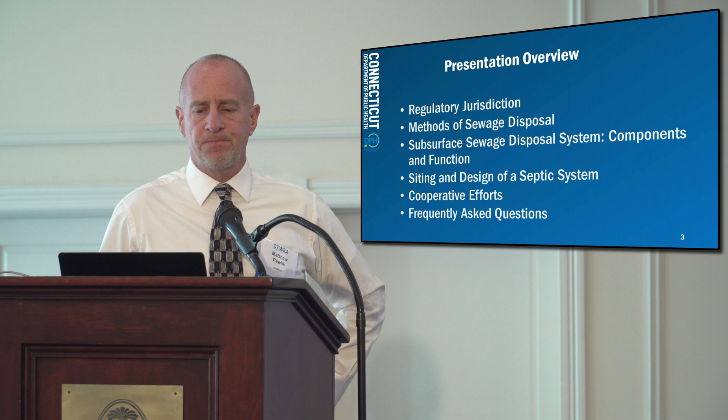I'm going to go into how we site them and design them, and then cooperative efforts and things where I think we have some overlap with the municipal folks, which you guys are here today, and also some questions that you may have. So I'll move on with that.

So how on-site septic systems are regulated in the state of Connecticut is really two ways of breaking up the jurisdiction. Jurisdiction is through gallons per day or design flow of a facility. And again, we're talking on-site systems here, okay? So we're not on municipal sewer. This would be somewhere where municipal sewers are not available. With that said, DPH, my group, does any on-site sewage disposal system with design flows of 7,500 gallons per day or less.

And then our partners over at DEEP have an on-site group similar to ours that would regulate on-site systems with greater than 7,500 gallons per day. The only other thing is they also handle what we call alternative treatment technology. Just think of any type of mechanical device or even a mini treatment system. That is also specific to DEEP, Department of Energy and Environmental Protection, irrespective of the design flow.

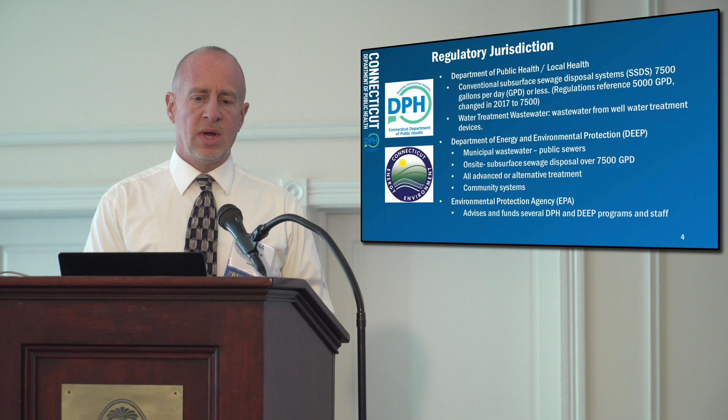So to give you an example, if I had a facility that had an on-site sewage disposal system and design flows were less than 7,500 gallons per day, but had one of these AT technologies on there, or anything other than a conventional septic system, which we'll talk about in a moment, it would still be regulated by DEEP, okay? Some of these DEEP facilities will actually have like a Zenon system on site, like prepackaged plants, that kind of thing. So it's not just the design flow, it's also if they have alternative technologies, anything other than a conventional sewage disposal system.

So right now, just like almost every industry, we're hurting pretty bad when it comes to staff. Our program supervisor left about a year ago. I took over for him. So we lost that position and my position, and we also acquired other duties. At this point, it's just myself and another individual. We basically split the entire state up when it comes to on-site sewage disposal systems. The good news is, we oversee on-site sewage disposal systems, but ultimately the local health departments are the ones doing the day-to-day issuances of permits and things like that.

There's no way two individuals could do that, but we're providing the oversight to those local health departments that are overseeing the day-to-day permitting and enforcement for on-site sewage. This is our current program structure. Ideally, what we functioned with in the past is 3 regions. That seemed to go well. We're also hopefully going to be hiring 2 engineer interns within the next several months.

It's not anything to do with this presentation, but we also handle things like public pools. We just acquired that duty on top of having less staff. We handle body disposal matters, which involve mausoleums and crematoriums. I don't know why they put that with us, but they did. And we also handle campgrounds. So it's like one-stop shopping. But primarily, we do on-site sewage disposal systems. Just to give you an idea of the pressures we're going through.

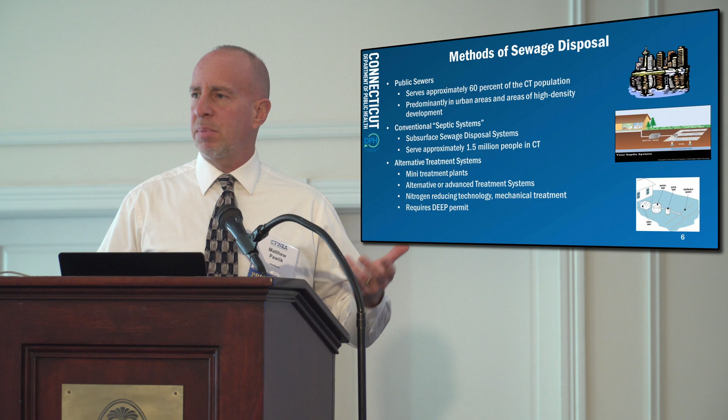So that may change in the future, but right now as it stands, you're not going to see alternative technology on anything other than a large, let's say, shopping plaza or a school or something like that. It's not going to be at a residential home, single-family home type of situation. So we'll talk about the components of a sewage disposal system. Again, these are ones that would be under our jurisdiction. I'll go through the different components. So here's just a basic slide here. And of course, some of the treatment trains are going to be similar to what you're going to see at a treatment plant, just at a smaller scale.

So what we start with is the building sewer, pipe coming out of the house, going to a large septic tank, which is nothing more than a settling chamber, to settle out all the solids. And then you go into what we call a leaching field, drain field, which is going to consist of some type of trenching or other type of device that's going to treat and then discharge the sewage back into the environment. So what was different with our systems nowadays and, let's say, 60, 70 or 80 years ago, was back then people just put this stuff in the ground and wanted to minimize any exposure. So there wasn't any thought that went into, well, should we be discharging this stuff into a water table? That's not a good thing.

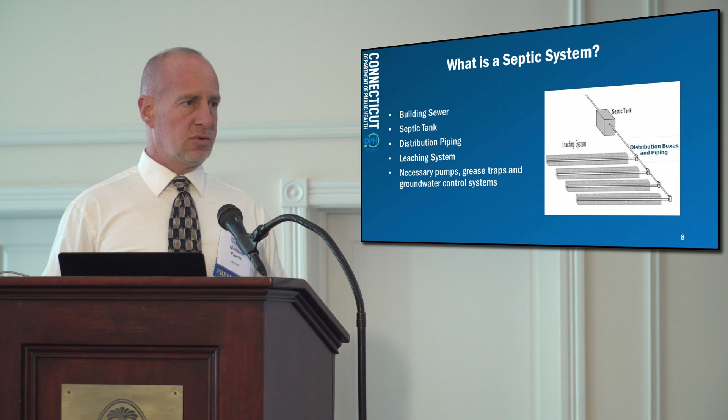So we've learned over the years, so our leaching systems are designed to actually treat the effluent before it gets back into our water table or into ponds, lakes, or into ledge rock and directly into our ground. So ideally, if they're installed properly, that should happen. So they're actually pretty effective means of sewage disposal. So breaking it down a little further, you have your septic tank. So we have some photos here. These are huge structures. I mean, just an average size concrete tank is about 1,000 gallons. That's the smallest for any of our structures. It's about the size of a small SUV. So these things are good size.

We also allow plastic septic tanks as well. That's been a good thing for a lot of sites that have issues with access, let's say. You can't get things in, heavy trucks and things like that. You can actually have a few guys carry some of these tanks. So when we have a site that has a failure and we have limited ability to access the site, these are a good option. Obviously, buoyancy is a concern with these. There's ways to work around that. Most of the time, the tank itself should function. It should always be full of liquid. Okay, so the only time it becomes buoyant is when they pump it.

So what we usually do in a situation where we have high groundwater and we have one of these plastic tanks in, we just tell people to pump it in the summer months when the water table's at its lowest, so it's not going to pop out of the ground. But anyway, so you get it. I mean, these structures are there to remove most of the sludge, the BOD, some nitrogen gets removed, phosphorus, things like that. There are 2 compartments. We have a filter on there. They're pretty good. I mean, the quality that comes out of a septic tank is clear. It should be if it's designed properly. So the larger the design flow for a facility, the bigger the tank, right? Because obviously you need a larger retention time for more discharge to it.

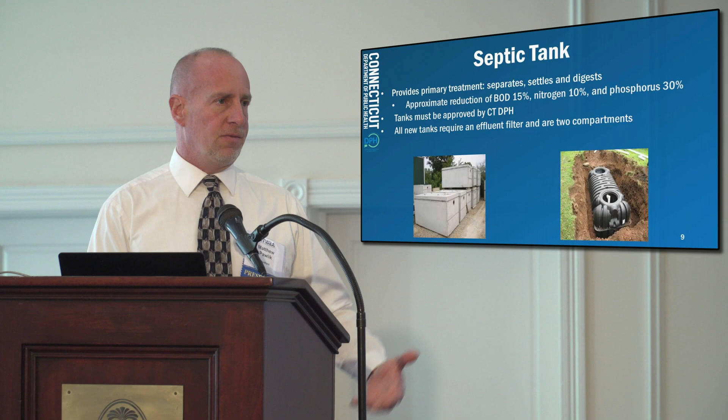And then we have our leaching products. I mean, we have so many different kinds in Connecticut. And just kind of an interesting little side note here as far as Connecticut goes is the way we credit our leaching systems is kind of unique from the rest of the country.

And what that's led to is a lot of these product manufacturers started out in Connecticut, and they're actually international now because we gave them the incentive to build these products because of the credit ratings, and so they went ahead and built them, and then other states or even other countries for that matter have accepted it. People like Infiltrator, Geomatrix, Living Filter, these are all manufacturers that started out in Connecticut because of our crediting system and gave them an incentive, and now they're all over the country.

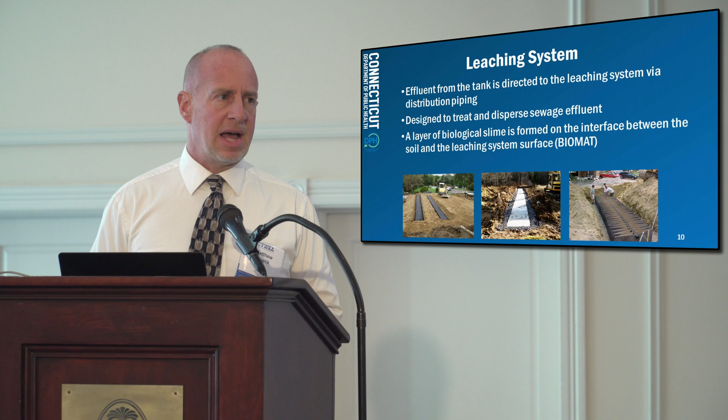But either way, the newer leaching system designs and what makes our crediting system more unique is we look at where the biomat forms. I'm going to show you a few slides. So again, a lot of this is going to be familiar to you because it's at a smaller scale than what you might see at a sewage treatment plant. So the expectation is this biomat is basically like a sort of a bacterial colony that forms on the perimeter generally of a leaching system, or in the case of our proprietary products, will form on the interface internally. And that's where we are sort of unique with other states because we give you credit for that.

But at any rate, the idea or the theory behind it is that if you have more biomat or more bacteria colonies for a given area size, you get better renovation, better treatment. And that's what led to these products that are kind of unique to Connecticut. But either way, it's relying on a bacteria to process and deactivate the waste and treat the waste.

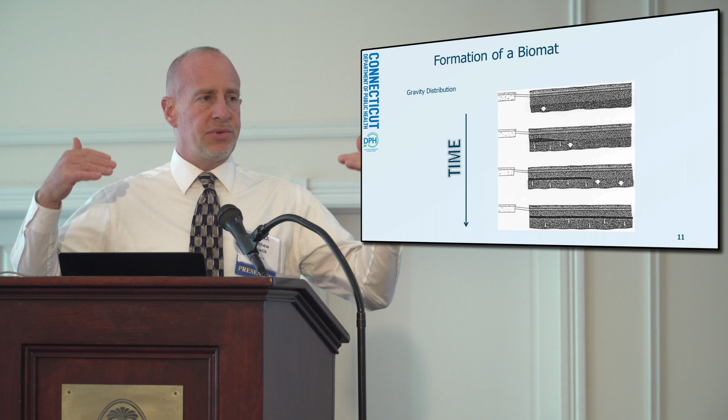And so here's just a slide just showing you that it takes time, obviously, for these colonies to form. And eventually they reach a steady state where it's sort of at equilibrium where the waste is coming in and it's having a certain ponding in there, but it's able to accept it and the bacteria are able to process it and you never overwhelm the system. So theoretically, they can almost last forever. I mean, there is a lifespan on these, I suppose, but if you pump your tank and you don't abuse your system, theoretically, the thing could last forever.

So go into a little more about siting and design here. So the thing to understand with our systems, as you can see, is they're soil-based systems. So we're relying on the soils of this site. So that really sort of limits or has effect on development for areas that are not on sewers, because if you don't have the soil characteristics that are going to treat your sewage properly, then you may not get what you want on your property. You may not get the 5-bedroom house or the commercial building and whatnot.

So one of the things we do is we go out and we dig big test holes, essentially, and we read the soils. And so we're looking for things like water tables. We're looking for restrictive layers, meaning a dense soil, or ledge rock and things like that. So our leaching systems are designed so that as the waste percolates from the leaching system, there's enough space between it and the water table or ledge rock so that enough treatment gets done before it gets into those areas of concern. So that's why it's very important that this step gets done, and it takes some time. We go out to the properties and read the soils.

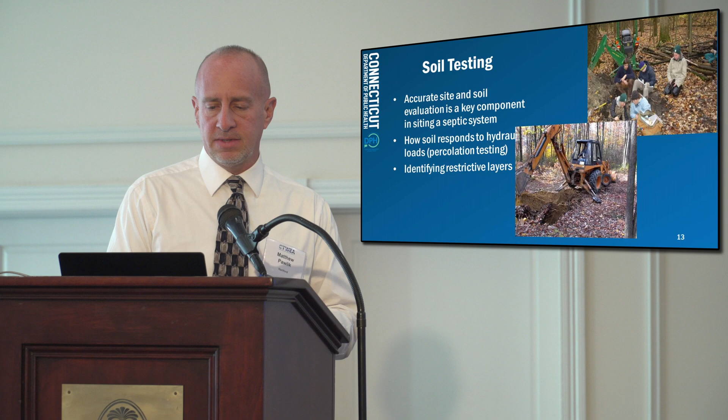And so here, as I said, just give you an idea of what our standards are. So, once we find a water table, it's actually quite interesting. You can actually read the soils and you find these clues. They call them redox features. It's like a soil mottling feature, which is almost like a bathtub ring after you wash your dog in a bathtub after it's real dirty, and then you drain the tub out and you see that ring around it. Well, this mottling or redox features are very similar to that.

So we can see where the water table was, even though it's not at its peak. So we can go out there anytime, and as long as we see that so-called bathtub ring, we're able to read where the water table is. And so we design on that. Because obviously you can go out in the middle of summer and the water table's well below the ground, and if you design your system based on that, you're going to be in the water table and it's not going to function at all. So it's important to be able to read these things.

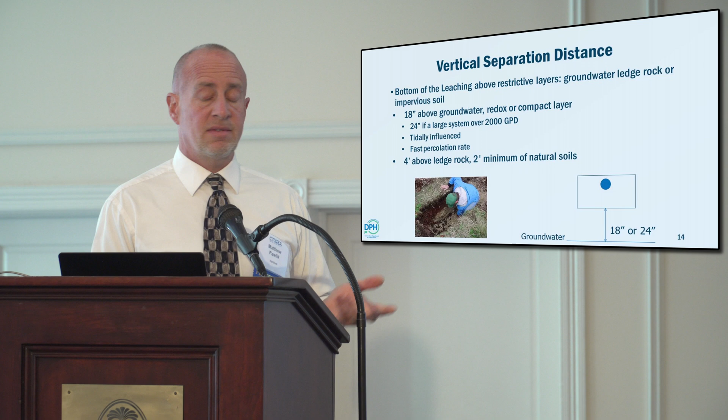And then we have our ledge separation. We do take into consideration coastal areas too. So tidally influenced, we ask that they put an additional separation just to account for fluctuations and actually sea level rise. It's one of our concerns as well over time. So another component is a thing called a percolation test or perc test. People sometimes use that term kind of incorrectly.

A lot of times they just use that as a generic means of all the testing that's done, including the deep test pits. But the percolation test is just a simple means of assessing how fast the water moves through the soil in a saturated condition. So it's as simple as digging a 6-inch, 12-inch diameter hole, 12 inches deep.

We pre-soak the soils so they're saturated, because that's what you're going to see underneath the leaching trench. You're going to see a saturated condition, so we want to make sure we mirror that. And then we pour the water in, and we simply measure as the water level drops, record versus time, and come up with a rate. Generally speaking, towards the end of the test, you're going to see a consistent rate, and that's what we design on.

So a lot of states moved away from this. They do it by texturing and everything else. My personal opinion: if you just utilize texturing, you're missing a major component, and that is previous site use. So I'll give you an example. Let's say you want to do a subdivision on an old farm where they were harvesting hay, running a tractor over this field. Had that been a forested area, a percolation test probably would have run a lot faster than after decades of a tractor going over it.

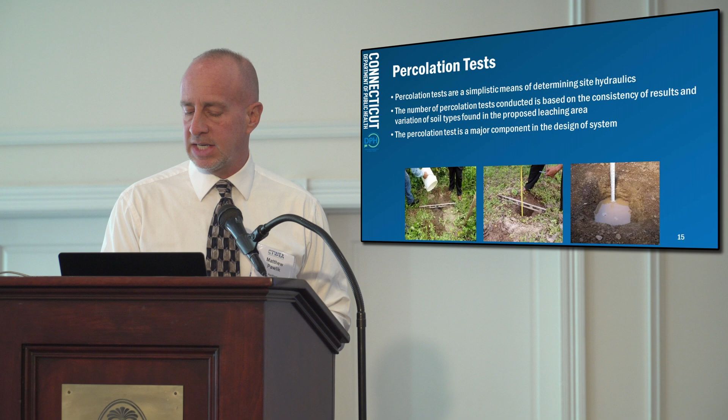So if you just did a textural analysis of the soil, which is basically just feeling it, you're not going to get the rate, you're not going to be able to determine that it's actually been compressed and it's going to affect your design, because you're not looking at it in place. So that's, in my opinion, one of the good points of a percolation test. You're not touching the soils below your system, you want to leave everything in place. So we want a test that's indicative of the in-place soils. That's why I think it's a good way, and it's done us well in the state of Connecticut thus far.

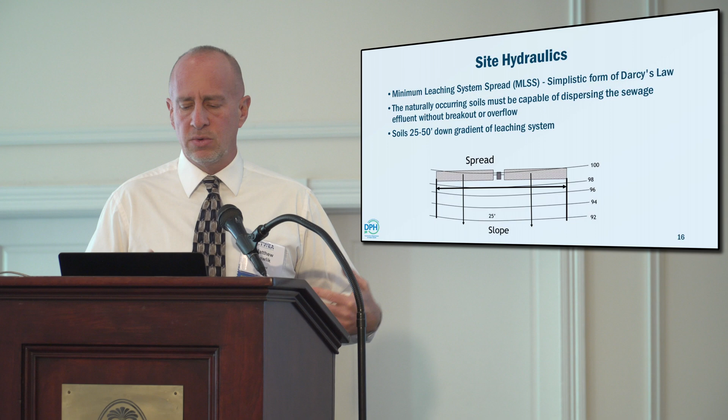We also look at a couple other things. I won't get too much into detail here, but we have a calculation called MLSS. It's just a silly acronym. Government loves acronyms. But it's just a simplistic form of Darcy's Law. So we incorporate that into our designs. It says we want to spread our systems out. We don't like to compact them in a small area, so we don't overwhelm the soils or the groundwater in those areas. We find that they function better and get better renovation when we use that.

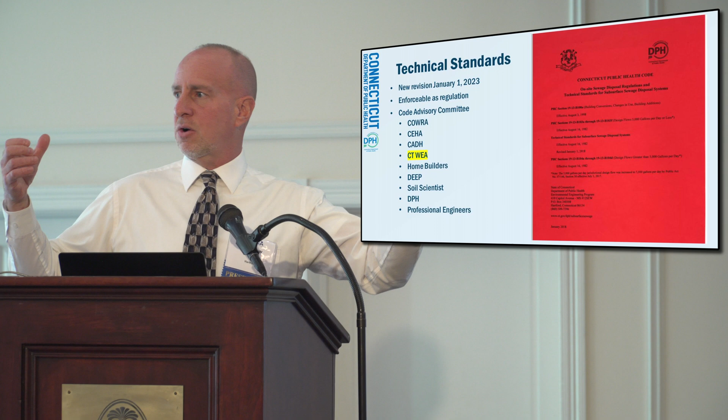As a matter of fact, we're going to be making a change come January 1st, 2023. These changes are mostly technical things, like adding a new technology, adding a new approved pipe and things like that. So we want the stakeholders to have a say. We want input from licensed installers. A lot of our setback distances are directly from these folks. Do you feel comfortable installing a septic tank X feet from a house? When you're having this thing the size of an SUV on a crane, do you want it 10 feet? Do you want it 15? So we try to get everyone involved that has a perspective that we may not have.

Because we don't physically install the septic tanks. So the other thing I was thinking about when I made this presentation up was some of the things where we've had interaction with sewer folks, and that is when you do sewer main extensions. Now, my department handles wells, but my section doesn't, but I just wanted to throw this in here. One of the things I would recommend is when you have a sewer lateral extension in an area, try to coordinate with the local health departments.

The reason why is they have all of the private well information in their files, because obviously you want to maintain setback distances from your piping to these wells. Sometimes that doesn't happen, and then there's a big problem. You already laid the pipe, and the well's 10 feet away, and it's oh my gosh, what do we do? So it's better to handle that ahead of time and coordinate with them.

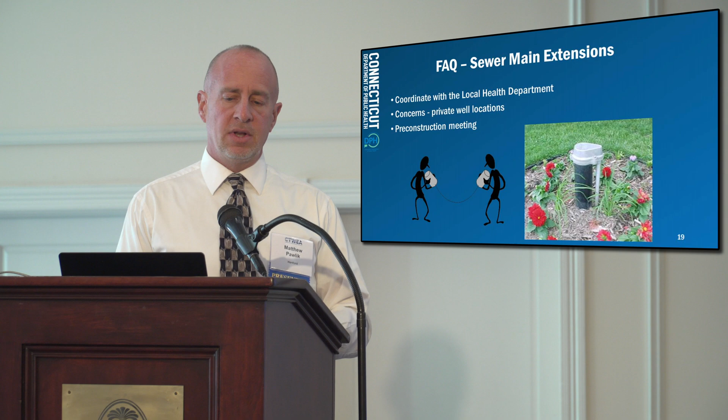Generally speaking, just to give you an idea, most of the piping that you would use could probably be as close as 25 feet. You wouldn't be able to get any closer than 25 feet for the piping for your sewer extensions to a private well. So just keep that in mind. But again, I can't stress enough that it'd be great to coordinate that with the local health departments. That way you don't have any issues.

The other one that we see, actually there's two in this slide here, I'm sure you're familiar, and we actually deal with E-One systems ourselves, ejector systems with our septic systems. So I'm familiar with those as well. But keep in mind the setback, and this goes back to private wells again: if you're putting these in for individual houses that are lower than the lateral and you've got to pump up, these need to maintain well setbacks as well. The minimum distance here is going to be 75 feet.

So when you're putting these in for individual businesses, homes, whatnot, if there are private wells in the area, be cognizant that they have to have a setback, which is going to be a minimum of 75 feet. That's consistent with our code too. Any sewage structure is going to be a minimum of 75 feet. The only exemption we have is piping, and that's why I told you the sewer lateral can come as close as 25 feet, and that's consistent with our code as well.

The other thing I wanted to mention is I know a lot of sewer utilities now have the whole FOG program with grease interceptor tanks and things like that. That comes up with us as well. But here's where the problem is. We get asked what's the setback for this to this or that, and I say, honestly, that structure is not governed by our regulations. I'm talking about an external grease interceptor tank. The only setback I can say for sure you have to maintain is to a well, because the well regulations stipulate that.

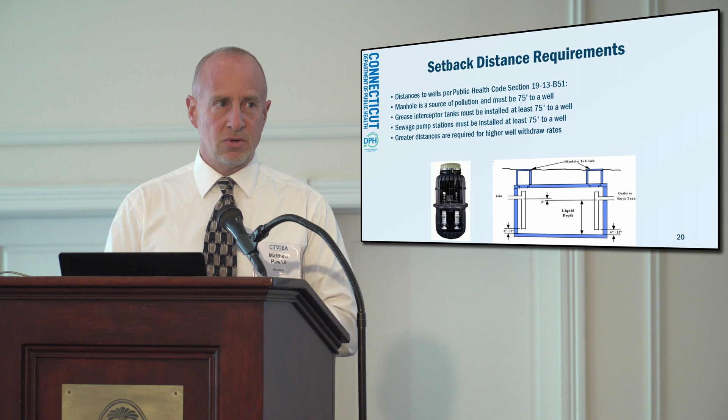But when we get asked how close this grease interceptor tank has to be to a building or a drain or anything else, I don't have an answer. I can tell you we have setbacks in our code. But when it's on a municipal system, it's sort of out in Neverland. There are no regulations that govern that, or no setbacks to my knowledge. Maybe there is, but wells is the one where you can cite that regulation. You've got to be 75 feet. So if you have an external grease interceptor tank and there are wells in the area, keep 75 feet from it.

So as my last slide, like I said, our program is decimated, but there are things I would like to do in the future. We would like tracking and maintenance. We'd like to do more education. We'd like to have a statewide management system. We'd love to have an SRF program, similar to what you have, to help homeowners fix their systems. A septic system repair can be anywhere from 20 to 30 to even $100,000 sometimes.

And that's a big kick in the teeth to a lot of people, especially when it's not like a new kitchen or a new car. You can flush the toilet again, that's about it. You can't look at it, it doesn't look pretty. So it's a big expense. Someday it would be nice to have that down the road. But first we've got to get our staff up to par.

So I'm going to ask if anyone has any questions. I'm happy to answer. Anything at all about our regulations, any overlaps, any questions on what I discussed about sewer and lateral extensions, well setbacks, anything?

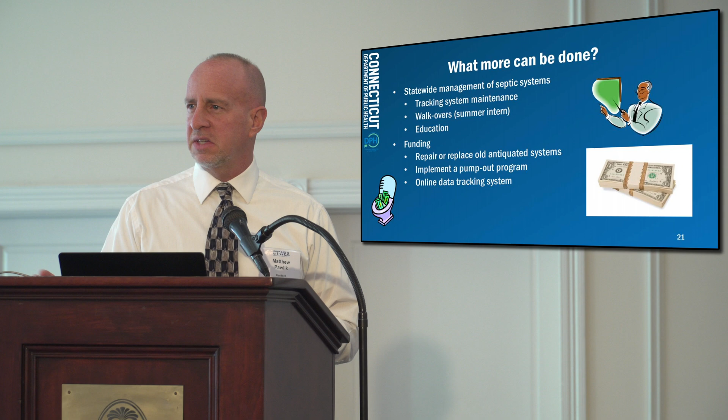Sure. USDA funding, is that available for rural residents for septic system repairs and replacement? Yeah, that's a good question. So, that's not through the state of Connecticut, because that gets asked often: do you guys have money? I am aware of that organization as an entity. That is a potential for people, and I have seen it work for folks. A lot of those, to my knowledge, are usually income-based. But the ones that truly do need it, I believe they do get it. So that is good, and we do refer people to that. So that's a good question.

Anything else, folks? Sure. Yeah, so you mentioned that the issue with bringing advanced treatment systems down to the personal septic level is just a jurisdictional issue right now. The traditional septic tank takes out about 10% of the nitrogen, where the ATS systems like they're using on Long Island can get up to, I think the highest is 87% removal. So there's a lot of incentive for that. Is it just jurisdictional? Would it just take a regulatory change or a legislative change? And how much funding would you need to transfer those duties from DEEP to DPH?

I can't thank you enough for asking that question, because I got a lot to say on that. So that is quite a hot potato. Here's the deal, and I was the point person in our program. There's talks right now between our department and DEEP and another entity on how best to get that done. What you're saying is a statewide use of this AT technology. Here's the deal though: because of the way that technology works, it needs maintenance and oversight. And I always say that's the Achilles heel. So you have to track that, which means on the government level, we got to track and enforce.